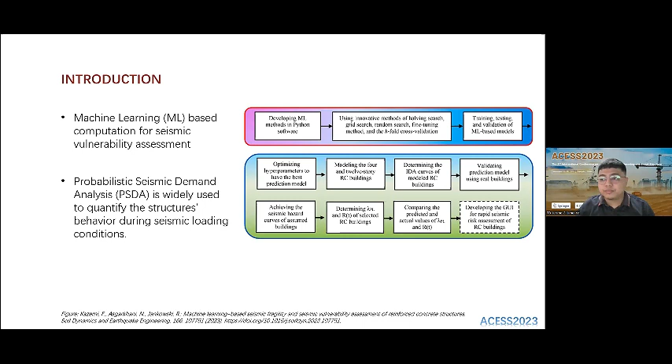Now for the materials and methods. The researchers conducted a four-phase review process to explore the application of machine learning in seismic vulnerability assessment. The Scopus database was used to search for peer-reviewed articles. The search was carried out using the following search terms: machine learning and seismic fragility assessment. There were 184 relevant papers identified through the database search.

During the screening, exclusion criteria were applied to the identified papers. One paper was not within the year range of 2017 to 2023, and 4 papers were not in English or without English translation. Therefore, 179 papers underwent screening by title, abstract, introduction, and conclusion. 107 of those were excluded because they are not related to the research question, and some full texts were not obtained. After the thorough screening process, 72 out of the 184 papers were included in this study.

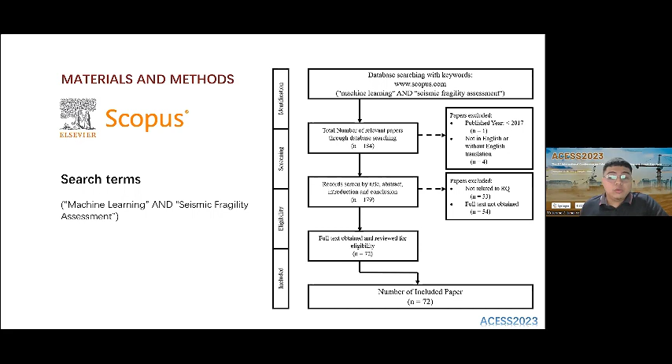After identifying the 72 articles, they were imported and processed using MATLAB's Text Analytics Toolbox to create a word cloud visualization. Latent Dirichlet allocation, or LDA, was used to determine the degree of similarity between source files and how each document is distributed across the topics. The figure on your right shows the most commonly used terms from those 72 papers: analysis, fragility, seismic, model, and bridge.

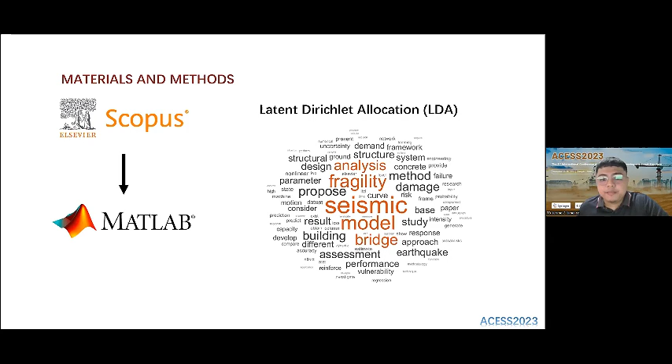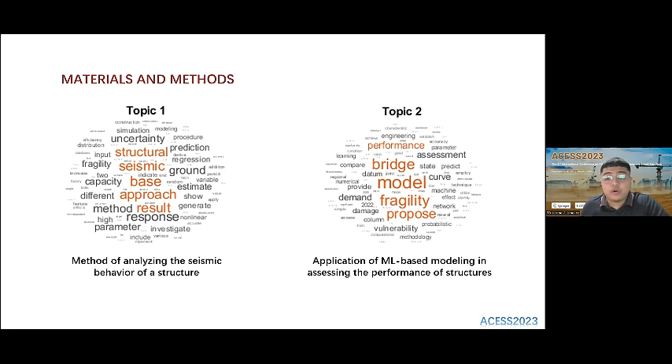MATLAB's Text Analytics Toolbox also provides word clouds of topics presented on your screen, which are used to interpret the specific topics for discussion. Topic 1 contained the words structural, seismic, base, approach, and result, interpreted as the method of analyzing the seismic behavior of a structure. Topic 2 includes performance, bridge, model, fragility, and propose, interpreted as the application of ML-based modeling in assessing the performance of structures.

Topic 3 includes design, structure, building, seismic, and earthquake. The topic discusses the design process of seismic-induced structures. And lastly, topic 4 has concrete, analysis, seismic, study, and system. The topic discussed was the development of seismic performance analysis of concrete structures.

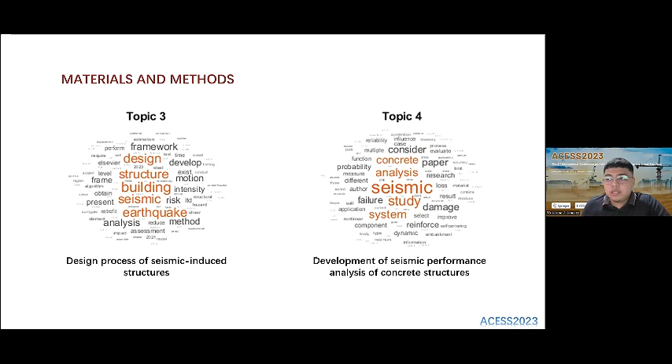So for the first topic, we have an overview of probabilistic seismic demand analysis. PSDA is a widely employed technique in earthquake engineering used to assess a structure's seismic response behavior. This approach enables engineers to understand the structure under seismic loading conditions. By incorporating this probabilistic approach, PSDA facilitates the evaluation of potential demands imposed on structures during seismic events, enabling engineers to make informed decisions in design and risk assessment.

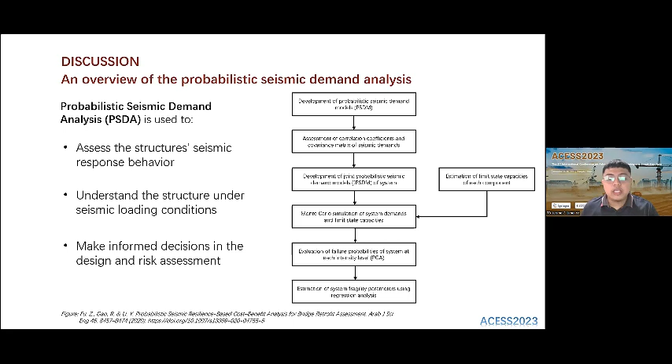So PSDA is an essential tool for the risk assessment of various structures. It is also an important step in the performance-based earthquake engineering, or PBEE, design framework. In recent years, researchers have continuously worked to enhance demand models and integrate machine learning-based methodologies into the PSDA framework. These efforts aim to improve seismic assessment accuracy and reliability, ultimately enhancing structural safety and resilience in seismic-prone regions.

So for the next topic, we have here the outcomes measured in probabilistic seismic demand analysis. The probabilistic seismic demand analysis encompasses various outcomes that are measured. In this table, the researchers identify the specific outcomes measured through the review of the included papers. We have the column for the main category and the column for the specific outcomes. First, we have the category of prediction. The outcomes measured here are the accuracy of prediction models and the prediction uncertainty.

Next category is the costs and losses. The outcomes measured are the costs and the economic losses. Next category is the environmental impact. The outcomes measured are the embodied carbon emission and the environmental impact. Next, we have the engineering. Outcomes measured are the engineering demand parameter and failure modes. Next category is life cycle. The outcome measured is the life cycle seismic analysis.

We have also the category for the intensity, which has the specific outcome of optimal intensity measures. Next category is damage. Outcomes measured are the probabilistic damage assessment and the seismic performance. And lastly, we have the risk category. The outcomes measured are the seismic risk probabilities and the seismic vulnerability of the structures.

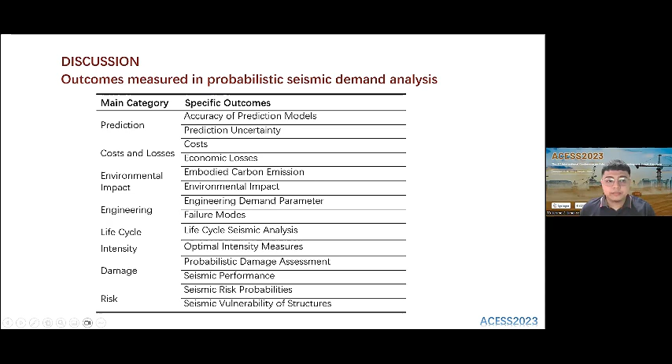So machine learning is a prominent area of research that focuses on endowing computers with the capacity to learn autonomously without explicit programming. This field has gained considerable attention due to its potential to revolutionize various domains by enabling machines to acquire knowledge and improve their performance through experience. Machine learning algorithms can analyze vast amounts of data, identify patterns, and make accurate predictions.

And many algorithms fall into distinct categories of machine learning. One is supervised learning, another is unsupervised learning, and lastly is reinforcement learning. These serve as the fundamental framework for understanding and classifying the diverse array of algorithms within the field. Demand models play an important role in the comprehensive evaluation of structures through performance-based assessment. And machine learning has then been utilized to derive the seismic fragility curve parameters.

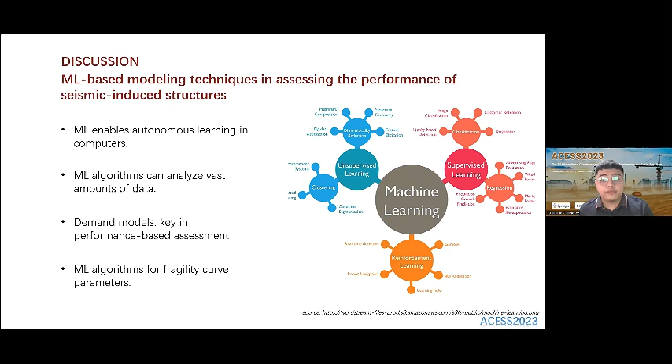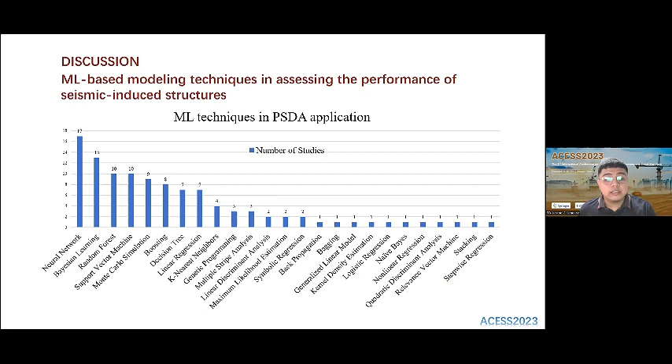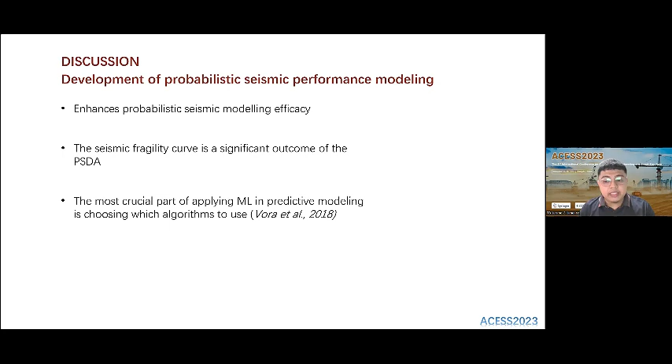So for the next topic, we have the development of probabilistic seismic performance modeling. Utilizing machine learning techniques holds promise to enhance probabilistic seismic modeling efficacy. Machine learning has also become integral to various applications, such as the identification of the seismic fragility curve, which is also a significant outcome of the PSDA. According to Vora et al., the most crucial part of applying machine learning in predictive modeling is choosing which algorithms to use. And the effective use of ML algorithms was observed depending on the chosen methodology.

So with that being said, the researchers then identified the research gaps presented in those studies. The following are the established challenges in machine learning-based PSDA. Number one is the limited access to data. Number two is the limited practical application. Number three is the quality of resulting models. And lastly, the versatility of algorithms. The effectiveness of an ML algorithm is affected by the features used, the size of the data set, and the balance between training and testing data. Several research studies found that it is challenging to interpret machine learning-based models, raising concerns about the quality of the resulting models. Further research is needed to fully utilize machine learning in seismic vulnerability assessment.

In conclusion, machine learning algorithms enable robust computation of the PSDA and rapidly assess the response of structures in conjunction with the earthquake. However, several challenges were also presented. Here are the challenges met in using machine learning-based PSDA. There is limited research tackling the wide usage of machine learning in earthquake engineering. Limited data sets pose a significant challenge in the application of machine learning, and there are limited practical applications of machine learning in PSDA.